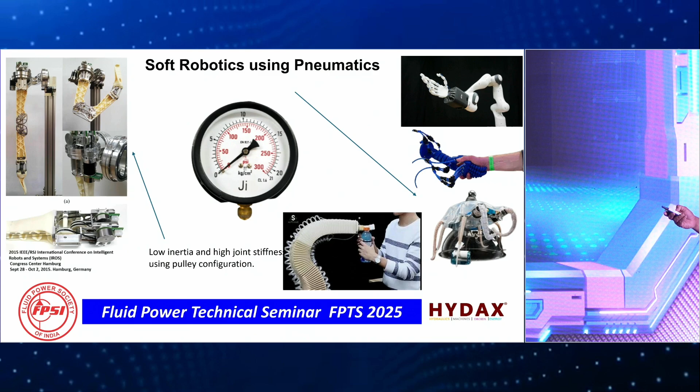As we all know about soft robotics, primarily soft robotics has always been using pneumatics, and it's got various explanations. In all of this, one thing which probably some of you might find very interesting is this little bit of research, and it's also turned into almost a product. I am not following it very much. Here, this bright Korean scientist, what he did was he brought about a low inertia arm and brought about a lot of joint stiffness. Now that was a bit of a motivating point for me, for us, to think about how we can bring about joint stiffness or rigidity, at the same time bring about softness.

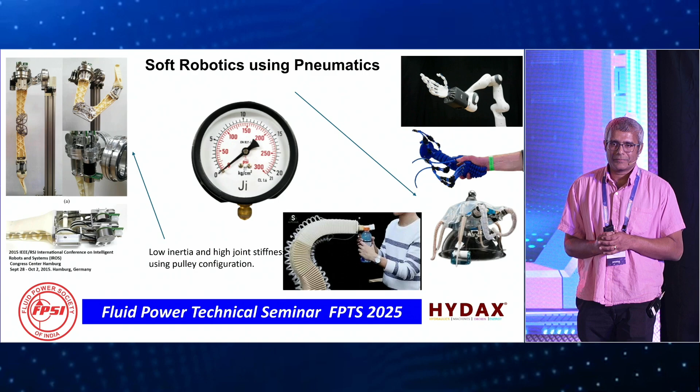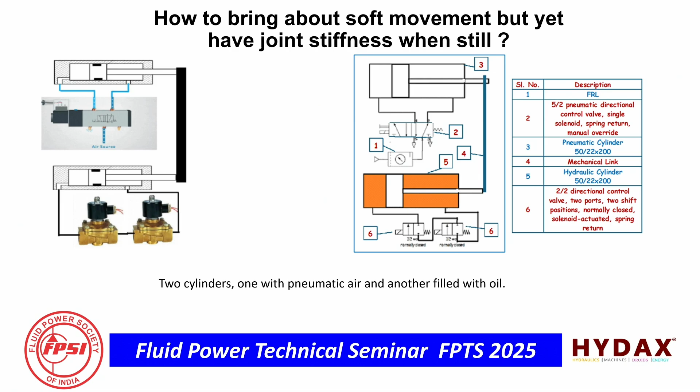Right, so we were looking at various methods of incorporating what we presented last year, which was pneumatic movement controlled hydraulically. And we took off from there. The idea was to make an application of it. So last year was plain theory, and this year we decided to bring the actual mechanism in place.

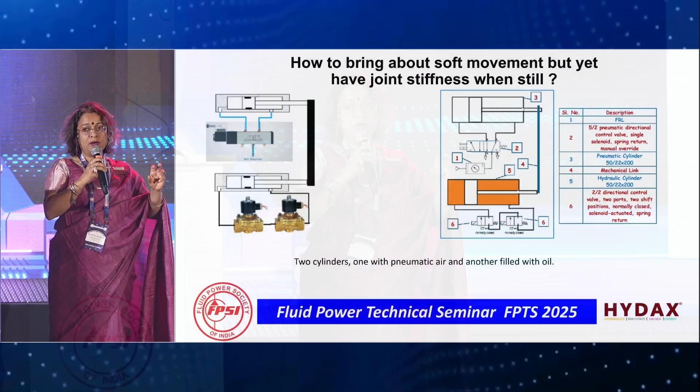It's been a year since we were working, so there were various other kinds that we explored. We explored the spine-like movement. There were the pneumatic joints, several joints pulled together. So we did try out several of these over a period of time, and then came to a combination of various joints which we put together to bring about the end robot.

So the concept here is very simple. We have two cylinders. One is pneumatically powered. One is just plain hydraulic oil, which is flowing in and out like a closed circuit. You shut off the cylinder, it positions itself. Both the cylinders are connected in tandem. Yeah, gamification of operations. I think Mithali is a better person here.

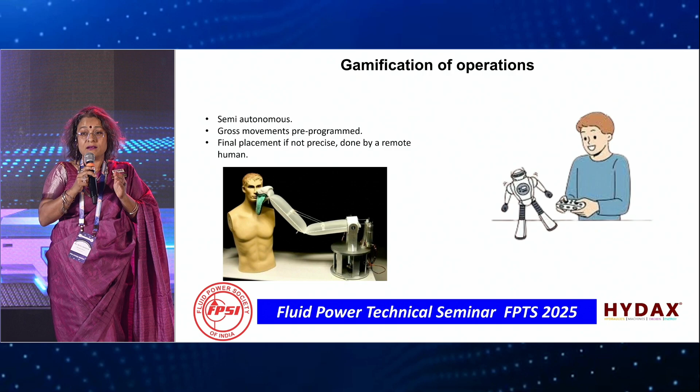Right. So this is one of the ideas that we've been exploring from a long time. Since COVID, this idea actually started during that time when we experimented with the pulley kind, it didn't work. And I think the starting point was automating the operations. But then the traditional means turned out to be very expensive. So we wanted to replicate the human, right, with the inaccuracy that a human hand could have, right?

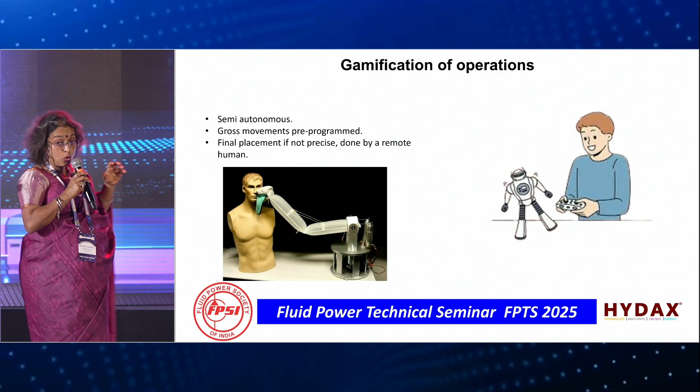So the whole robot has been designed where it is semi-autonomous. The gross movements are pre-programmed. So pretty much if you're trying to take it from one position to another, that part of it is programmed. But the fine-tuning it, and more than anything, it is just the monitoring. So it's like a master-slave arrangement. The monitoring of it can be done remotely by a person. So it's almost like gaming.

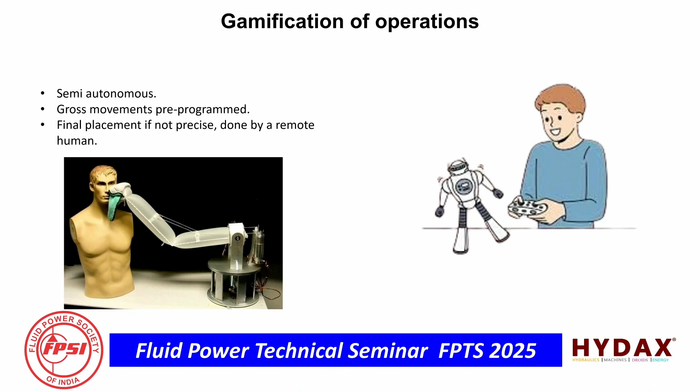I must say we are also working on the software part of it, and I wish today we had the mobile to give it to any of you all to operate the robot, which is here right now, and we've brought a working model for that purpose.

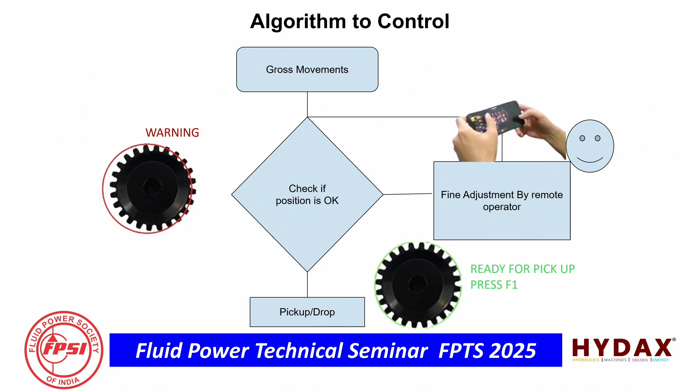The idea right from the beginning was that it has to be a remote operation. It simply did not make sense to have another person on the shop floor and then call it autonomous. Then the whole concept would not work.

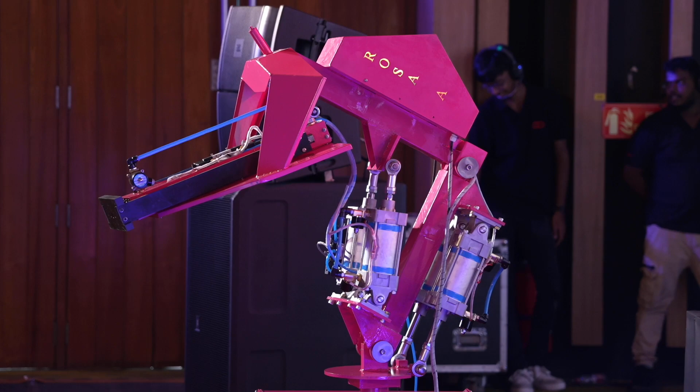So there is a software which we have developed in-house where the robot can be operated remotely by anyone through our server and from any part of the world, through the software that we have written. So we are looking at how we can bring the gaming community, bring about gainful employment, and not pay PF, because probably they're just gaming and enjoying. Most industries could work with that if it goes by all the laws.

This was the proposed Rosa. These were the various joints that we looked at, the combination of joints. Joint A is a rotary joint. Then we have joint B and C, which are the elbow joints. And joint D is also a linear joint. So these together show the various movements.

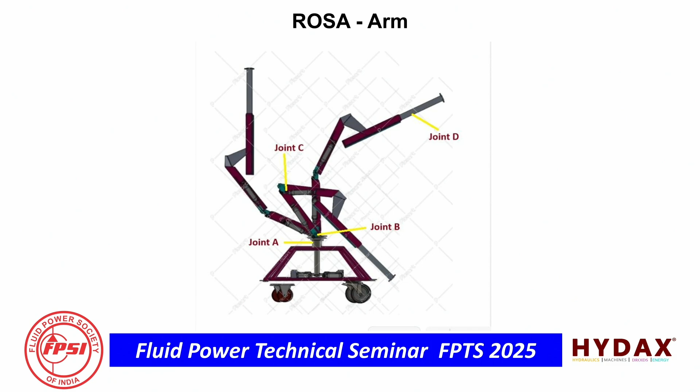They are not multiple arms, it's one single arm showing all the different possible movements. Why we chose this design is primarily because we wanted to experiment, play around with various joints - a rotary, an elbow, a linear - and see what happens.

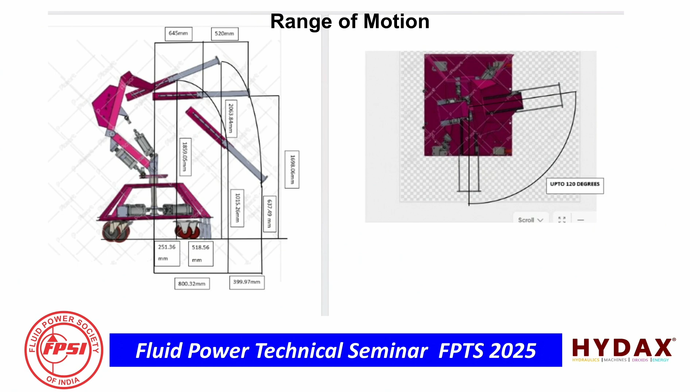This was the range of motion. You can see it's all in millimeters, so you can position it like an arc anywhere around and extend it straight in. Of course, they don't have an end effector - that will require another 2 axes, which we have not got to yet. The rotation is about 120 degrees.

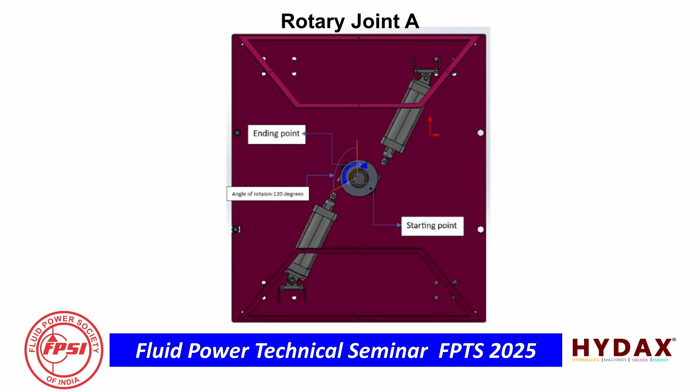This is the rotary joint, right at the base, which gives the all-round movement. Then you have your elbow joint, which is pretty much like any other JCB.

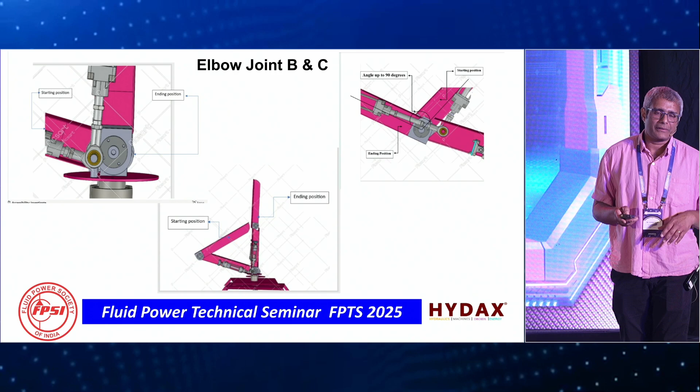Now I must share something with you. I've always read about singularity, understood a lot about it, but for the first time in my life I actually saw singularity. Singularity is when you have multi-levers where you need an infinite amount of force, and basically the levers get stuck, to put it simply. We didn't get it right the first time - when we designed it, we didn't use complex software to understand singularity, but were just using simple Solid Edge or 3D CAD to understand motion, and that led to a lot of singularities.

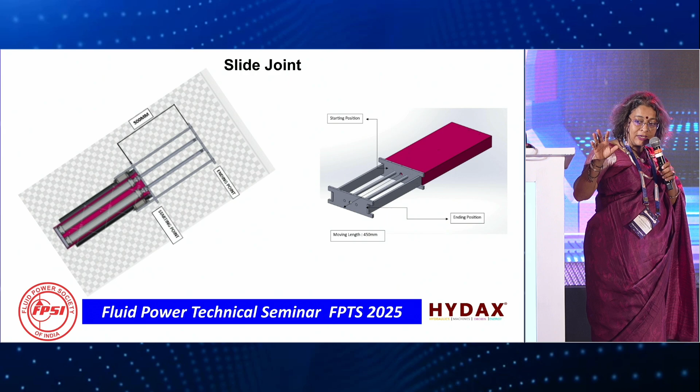This is the linear slide - these are slide joints, and thereon it can have the end effectors from that point on, which we have left open for the moment because it's pretty much open for anyone to use for whatever application they see fit. We have focused mainly on getting the joints in place, but not the end effectors.

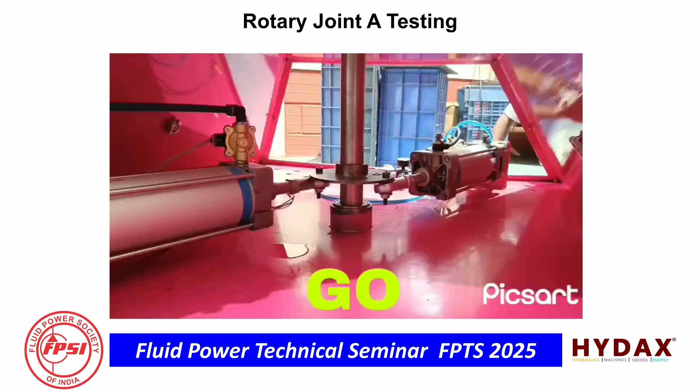So we have the joint testing - we have a live demo here as well as the video. This is each joint where you can see it stops at various positions. In the video it stops, but here right now, since the objective was not to talk about AI, the objective was to show multiple joints working pneumatically yet able to position. You will not be able to see it stop midway perfectly because we have just made it go at random positions.

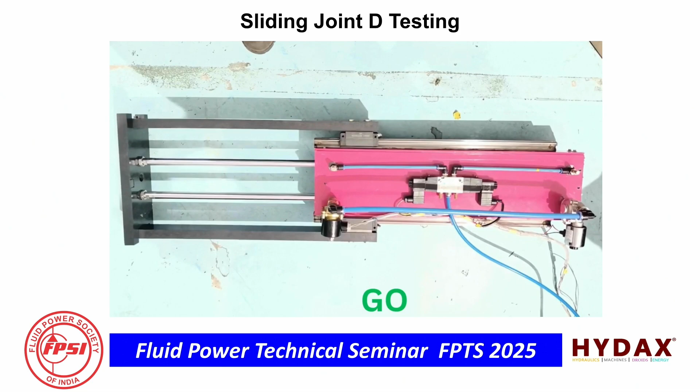And this is again a linear joint testing. We can keep running it. So we have a linear joint over here, you can see - stop means it stops in between, go means it goes in between.

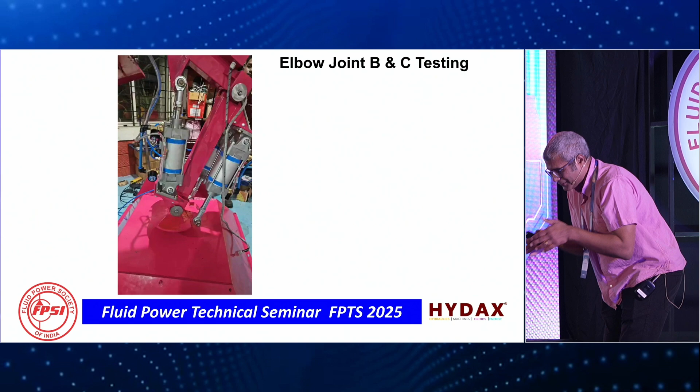Over to the next slide. Now this is the elbow joint, and we have two elbow joints. We were looking at how a robot can go this way as well as go this way. Then singularity, you know, made us go only so much and only so much. We are still going to work on it.

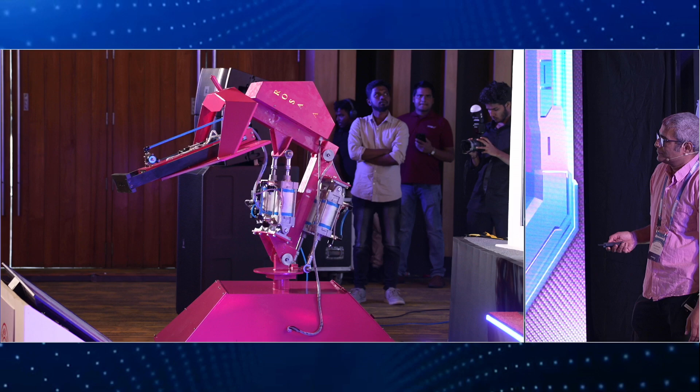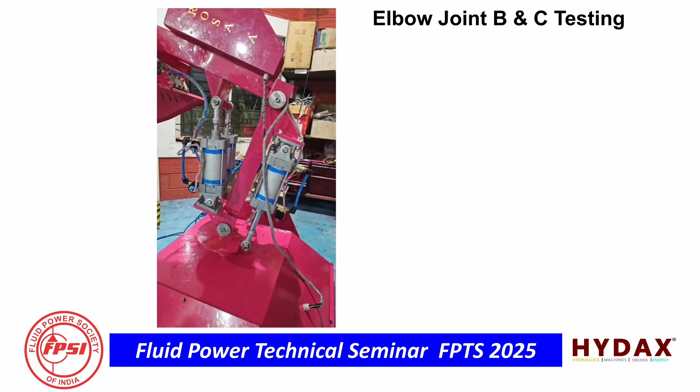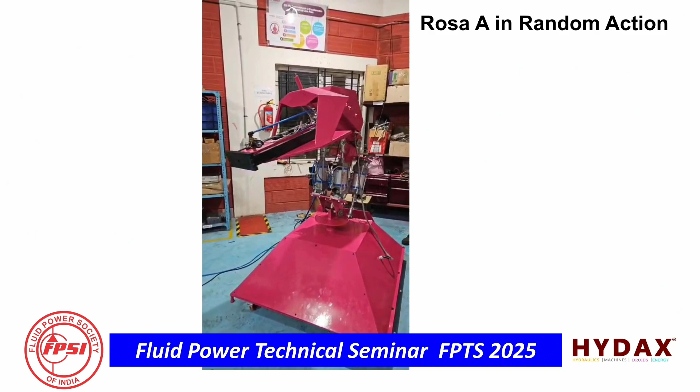An honest confession - as much as we started work on this last year, like all college students, we decided to bring it up only at the last minute. We started work on it, had a different problem, and had to rework the entire thing. Last night, yesterday evening, was the first time it was all put together and started working. So here it is, and there's lots more to be done, especially right now it's pre-programmed. Once we integrate the software into it - which has been done, but we need to put it in place out here - it can actually be controlled by any of you in the audience.

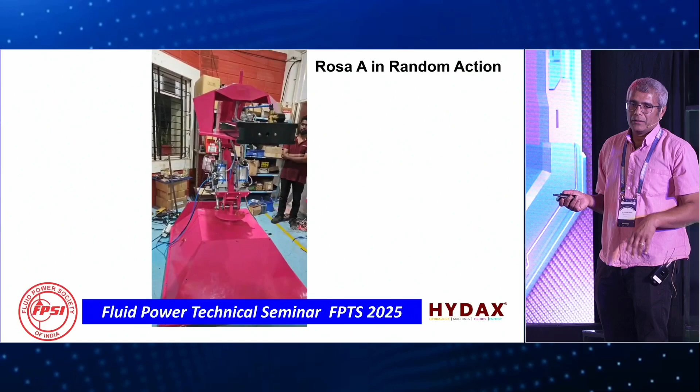Yeah, it can be controlled by any of us, and the most important sensor for the AI is the camera. It works completely on image and not any other positioning system. So if it sees a human, it stops. If it sees certain colors, it goes. Certain colors, it stops.

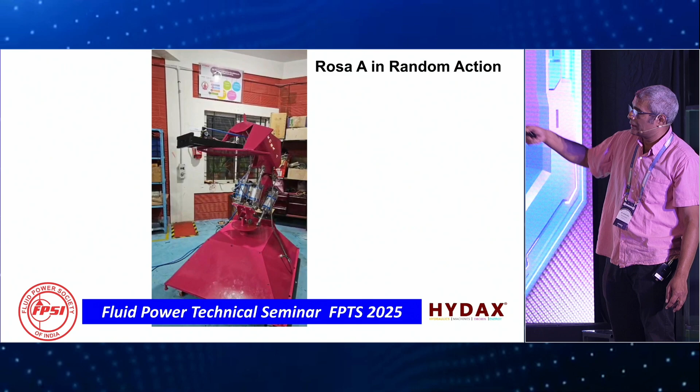Yeah, the load - so in the previous paper we had tested the linear axis with the load, and it was designed for about 16 kgs and it works successfully. So you can refer to the previous paper.

Alright, so I don't know, I have to ask Mithali if she still wants the robo with water, to bring water. Actually, it started with that last year where every time we sat to eat a meal somebody wanted water, and I said, you like robotics so much, why don't you make a robo to fetch water? So he says, now do you still want water at the table? Yeah.

So I know most of you are surprised as to why we are using pneumatics and not servo. Just a quick recap of my last year's paper: the cost of a joint, a robotic joint, will be anywhere between 1.5 lakh to 2.5 lakh, depending on various conditions. You're also looking at a very rigid robot, a huge amount of inertia being managed to a final endpoint, which is probably about a payload of 5 kgs.

And if you want to reduce the inertia, and yet have a certain amount of joint stiffness, and yet make it economical and easily available with things like pneumatics, then you need a very clever software for it, a very clever AI. That's not part of today's presentation. But please feel free to shoot the idea down, because we will learn something from it.

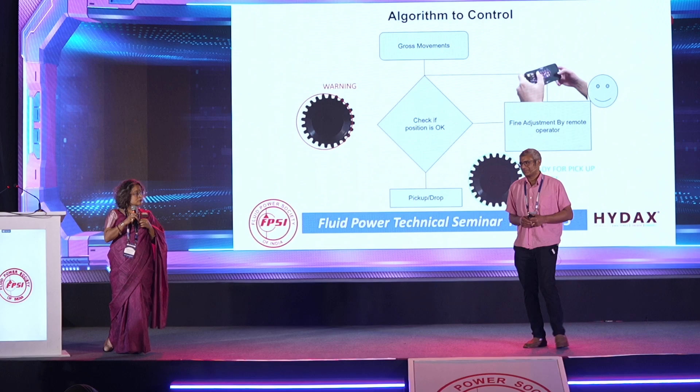Any other questions? Yeah, please. So the current industrial robot, which is used to place the object on a machine and take it back, costs somewhere around 35 lakhs. What is the target cost that you are aiming at?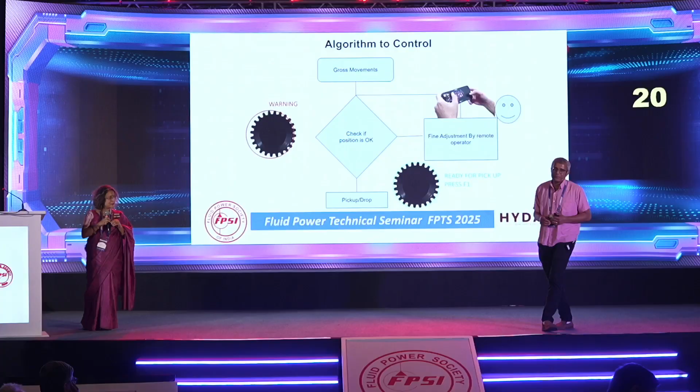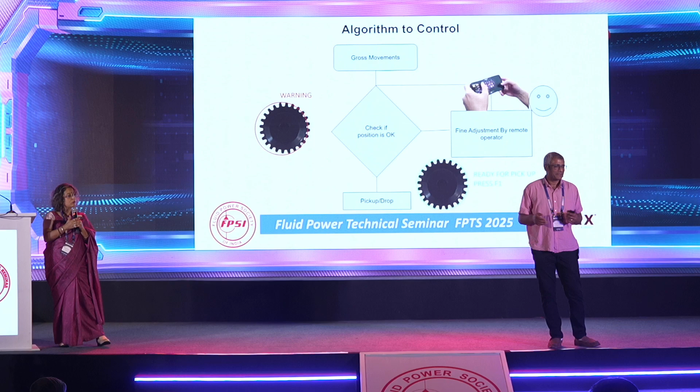We have never gone till there yet. No, some aim, some target. See, the current 6-axis robot - I have come across a person, an ex-IITian, who is running an industry there, and he tried to bring it to 20 lakhs. He told me, Ashwin, whatever we do, a 6-axis robot cannot be less than 20 lakhs for a payload of 5 kg. So I suppose in this case, the mechanical system, as you see, is just like on a JCB, nothing phenomenally innovative. But the cost could probably be less than 20. Of course, you have the software, the AI, which is again community-based, and it should grow from there.

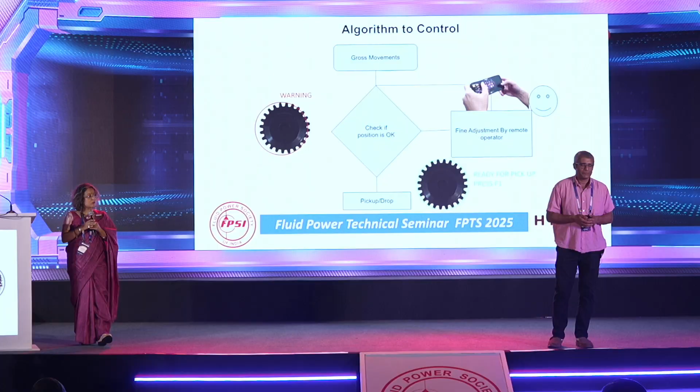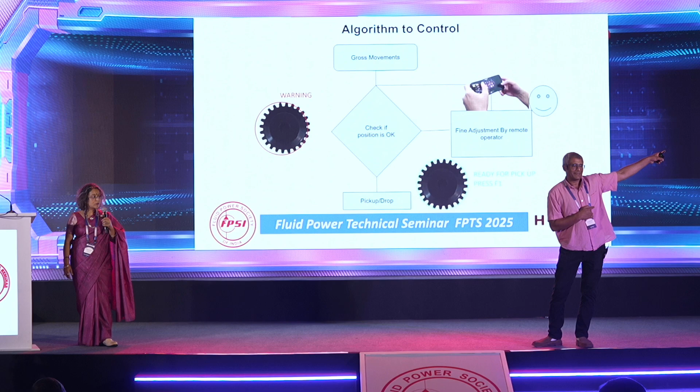I find things are not smooth movement, so we are not running at the proper air capacity. We have a compressor somewhere very far up there, so there's a lag, and it's a very small 50-liter compressor. We are using 100 dia cylinders, 100 stroke, so air is consumed. Okay, thank you.

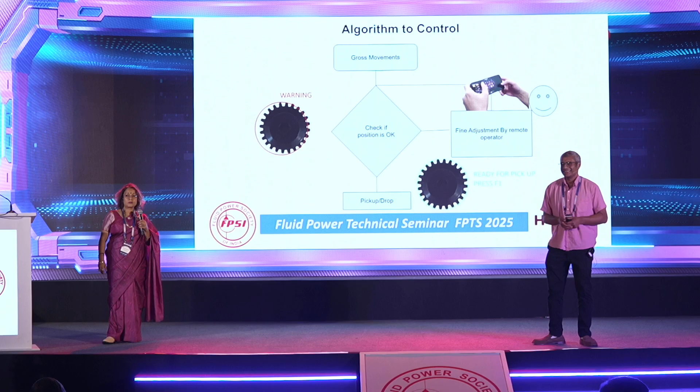For a change, we will ask you a question: how much are you willing to pay? Right, thank you, that gives us the benchmark, right?

See, I definitely feel that any equipment which is designed should be used by an MSME at a reasonable level of cost, and it should be used by most of the MSMEs. So I would target it somewhere around 5 to 6 lakhs.